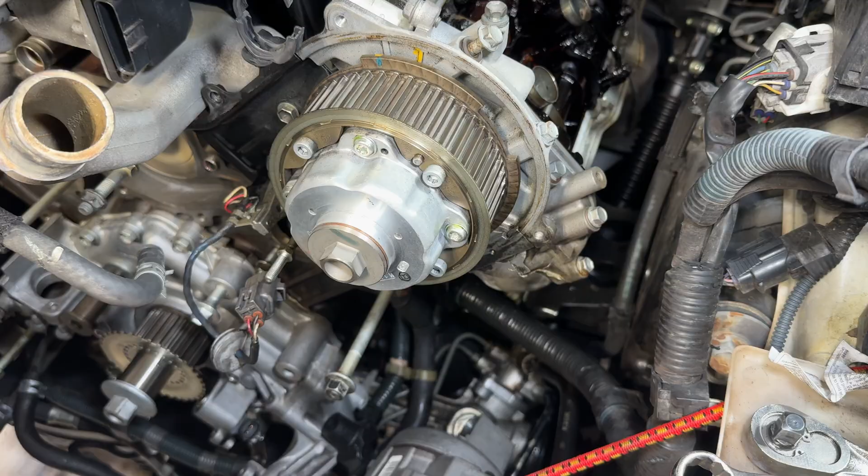So in today's video, we're going to be working on the GX470 again. I'm in the middle of my timing belt and water pump service, but I'd have to change the cam seals on here. So instead of doing it all in that long video, I decided to have a separate video just detailing how to change that out, how to take the cam apart and the VVTI gear apart so you can access that seal and change it out.

On the 2008 version of the GX470, on the 2UZ motor, they added VVTI, so changing that seal is a lot more involved than it was on previous versions or older versions of this V8 engine. On the previous versions, all you had to do was take apart the cam gear and put it on. On this one, you have to take the cam apart and everything. So in today's video, we'll go over all the steps of doing that, so stay tuned.

So I'm in the middle of doing my timing belt service, and I wanted to make this separate video detailing the cam seal and how to do that. This cam seal is a big pain in the ass, and most people don't do it if it's not leaking. And really, if you're not leaking or showing signs of leak, you shouldn't really do it either. That seal lasts a pretty long time, but if you do need to do it, this is how you're gonna do it.

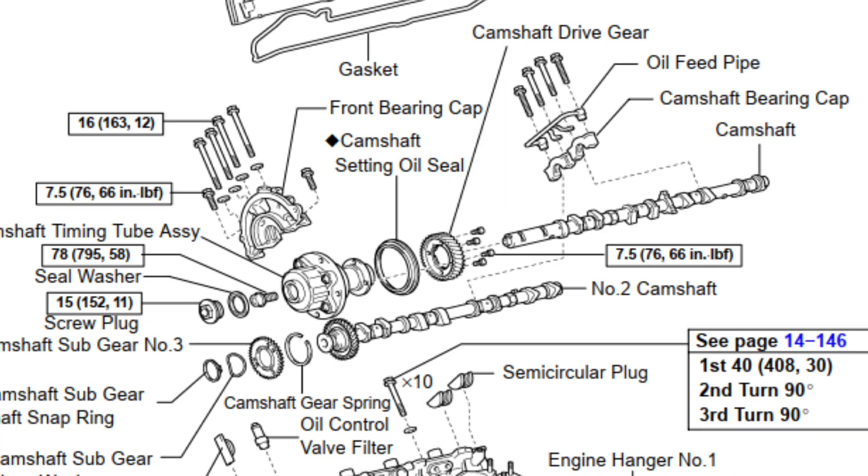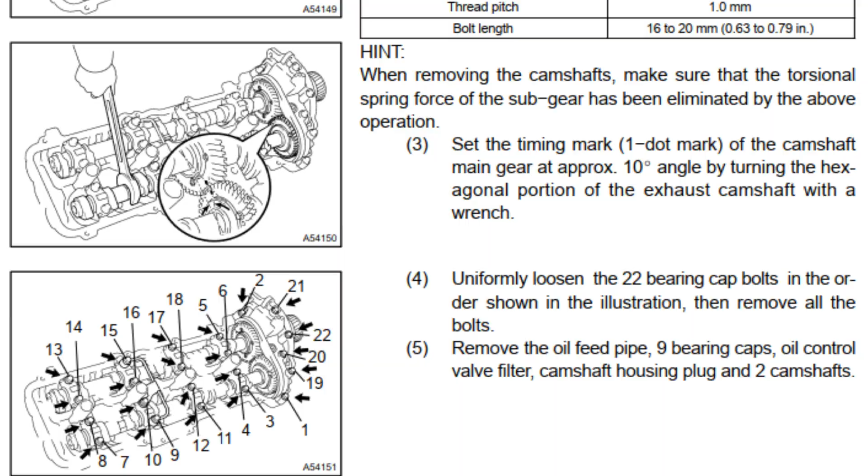So with the VVTI version of this engine, it's very hard, and you have to actually remove the whole cam out of the way and do it off of here just to get that seal. I think on the earlier versions without the VVTI, you could take that off and just change the seal right in the front, but now that they changed it up, you have to remove everything in order to do it. So the first thing you need to do is actually take this whole thing apart.

On the one without the cam gear, you have to put a service screw in there. In the factory manual, which I'll link down in the description, you actually have to set a 6mm screw so you don't mess up the spring loadedness of that second cam. On this one, it's all one piece and you can pull it off. Once you do that and put that set screw in at top dead center, you can go ahead and start unbolting all the cam caps.

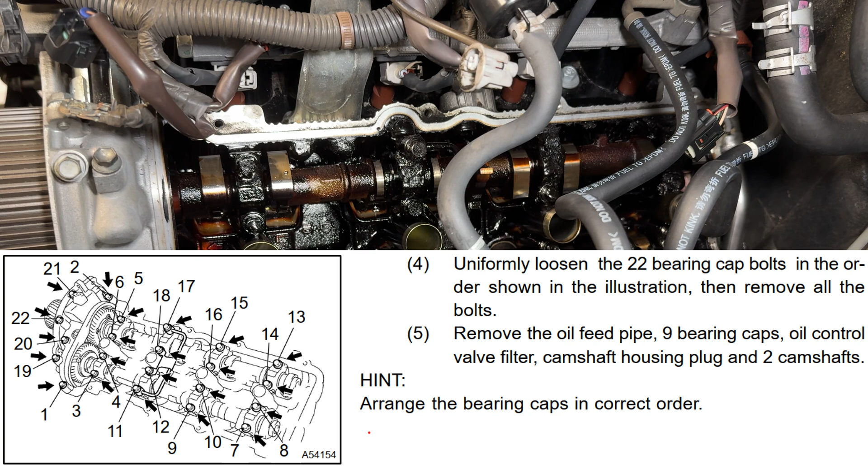There's an order to unbolt these cam caps according to the service manual, so I'll post a picture of it right now so you guys can see. Based on the order, you want to just start loosening. The first thing you want to do is loosen all these little 10mm using like a breaker bar, because they're pretty tight on here. At least mine are because of all this buildup and sludge that I have in my engine.

But go ahead and slowly unbolt or break all the bolts, being careful not to strip them. It might be good to have a couple of spares on hand in case you strip the bolts. You don't want to mess those up and then not be able to take it off later or put it back on.

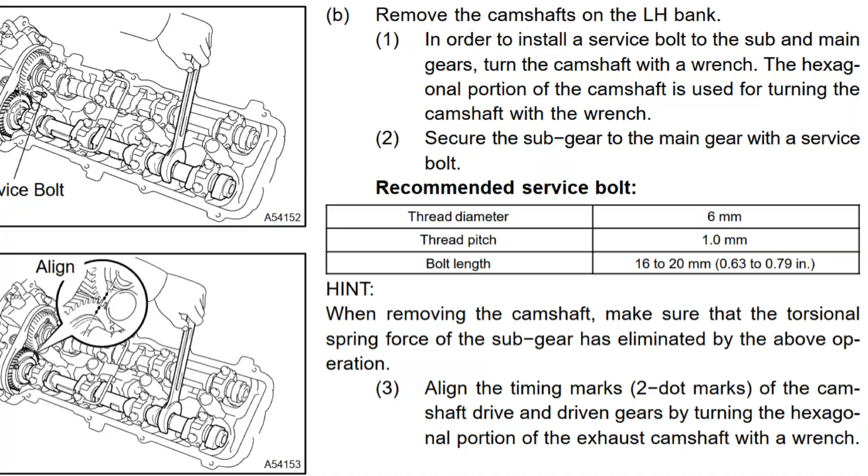On the driver's side, it's a little bit difficult because you have to actually turn this, because right now everything's in top dead center, but these things need to be turned all the way over. So you want to use that hex cutout that's back here, using a 23mm wrench. I think there's another cutout right here too, where you could put a wrench in. You want to turn this thing.

On this side, they have the 2 single dots, which is not where you need to put that service screw in. You actually put it on the 2 double dots, 180 degrees from this. So we got to turn the cam 180 degrees, get the double dots, and then we'll put the service bolt in over here. The wrench over here to hold the cam is actually a 24mm.

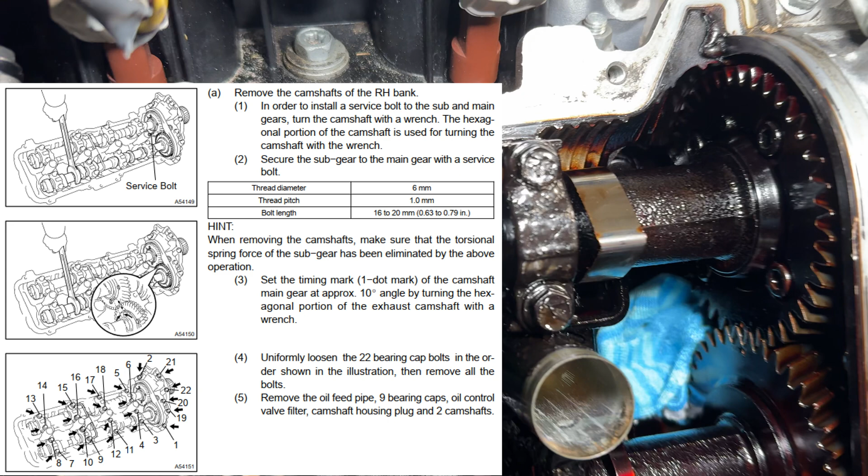So on the passenger side, what they want you to do is turn that thing about 10 degrees towards your way right here. Once we do that, we release the pressure on the cam and it sits freely, right? So you want to keep it about 10 degrees right there, and you can feel it release its pressure. So you want to do that, and then now we can start unbolting everything.

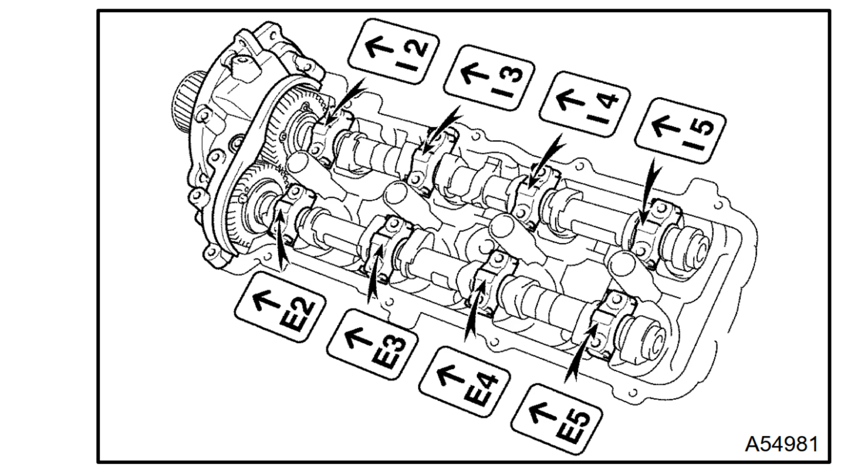As you go across and unbolt everything along the way here, you go ahead and just take those things off, kind of clean up all the cam caps. You don't have to worry about the order of them. Once you clean the top of these things off, they are all numbered from 1 through 5. 1 being the front here, 2, 3, 4, 5, and then you have the intake and the exhaust side. It'll have an E and an I on the cam cap, so you won't be able to mix those things up.

But as you go ahead and unbolt everything, the last thing you do is the front here and the 4 of these bolts that you take out. So these bolts all have like a seal washer on them. Be careful with that seal washer. I messed up 4 of mine by soaking it in Super Clean. That rubber does not take to Super Clean very well, so you want to take that thing off. Once you clean it off, you want to clean it with something that won't mess up the seals on these, unless you want to replace them at $5 each.

But overall, as we take off the cam cap, you have the VVTI actuator that you need to remove. So before we start anything on the VVTI and taking the cam out, you actually have to take these 4 bolts right here, the Allen keys, not the stars. Do not mess with the stars. Those are not supposed to be unbolted. That's all part of the VVTI gear. You want to take apart the Allen keys all around here. There's 4 of them. Take the actual ring for the timing off right there, because once you unbolt everything, there's actually interference between the cap and this, so you have to remove that.

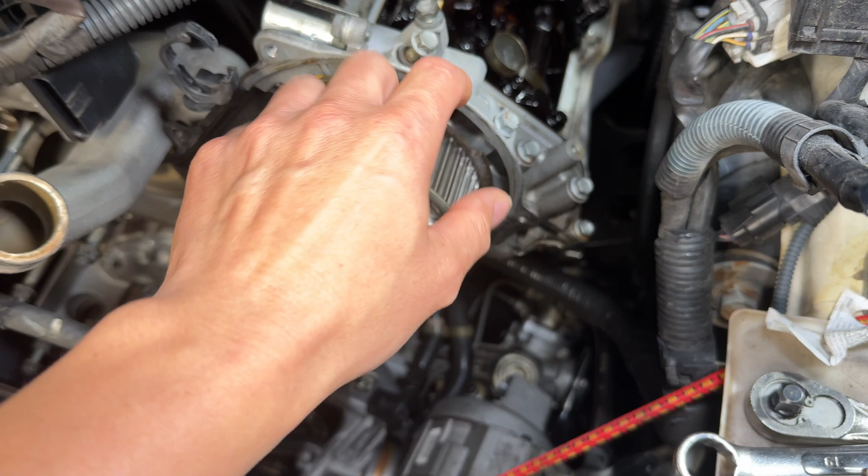Once you do that, you could take the cap off and you could pull the whole cam out once you unbolt all the caps. And pretty much unbolting it all, it's going to be the same on both sides as far as the left side and the right side of the motor. On here, the left side on the US cars, you have the fuel lines and kind of all this stuff in the way that you have to work around. On the other side, it's pretty much wide open on the intake side, so it's much easier to do on that side.

And one of the things you want to do, just so you don't accidentally drop a bolt, a screw, a socket, or anything down into the oil pan, there's 3 or 4 drains at the bottom of the head here. You want to stuff those with a rag or something. For the oil passages, the ones on the bottom are pretty much the same on both sides. On the driver's side or the left side of the engine, the big hole is on the back side here. And I don't think there's a big hole or any hole on the front, whereas on the other side, the passenger side, it's kind of flipped, where the big hole is on the front, but there's no hole on the back side of the head.

Since I'm cleaning everything, I'm gonna go ahead and remove the lower little black timing cover here too, along with everything else on this side. As well as the other side, it's actually held on by this sensor bracket right here for the cam position sensor. So I'm gonna go ahead and just start unbolting this right here.

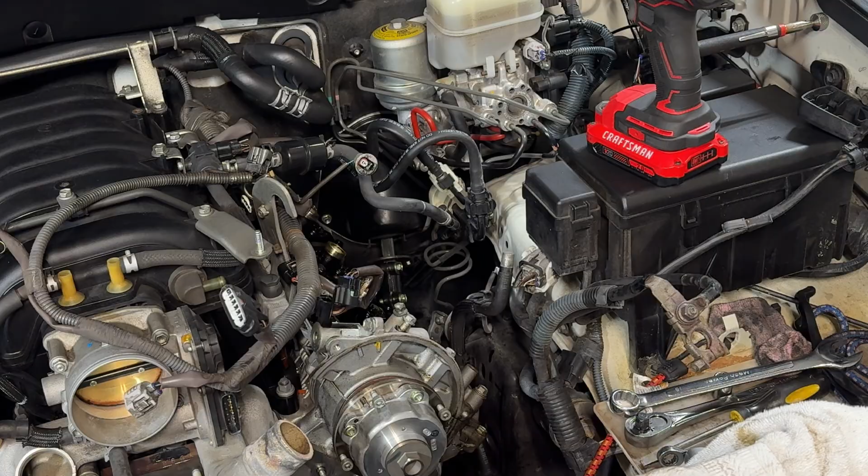So what they want us to do now is kind of turn this thing using the little hex spots to find the double dots on the cam. So we got that in there. So we want to go ahead and turn this thing so it's at the 2 dots so we can remove the cams. All right, so we got the service bolt in, we got the cams positioned. So we start unbolting all the cam caps now in the order that is recommended in the service manual.

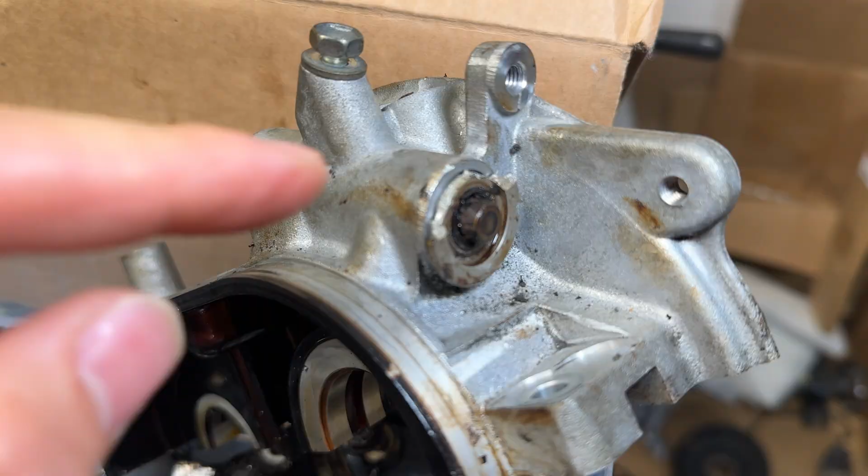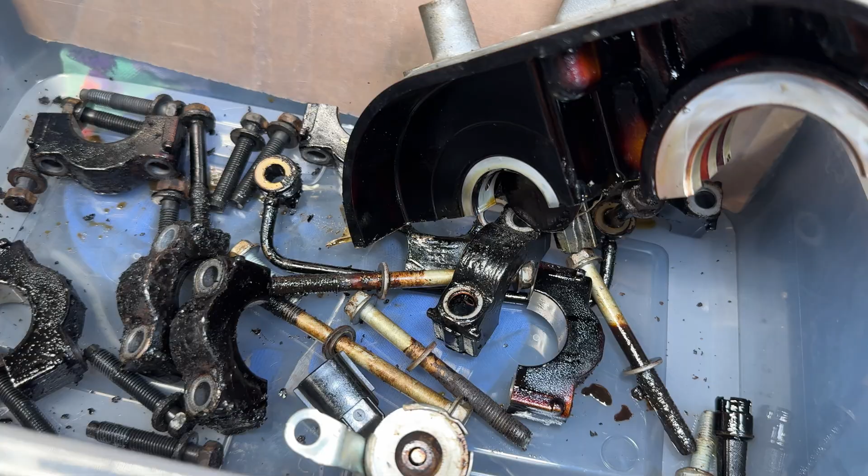So right now the casting basically broke, so I probably have to replace this with either a used one or an aftermarket one. So I'm not looking forward to spending more money on that crap. Other than that, the rest of the stuff, this time I'm going to go ahead and try to soak this in some diesel, see how much that dissolves this grease, and then we clean it off, and then I can hit it with some Super Clean after that, and then put it in the ultrasonic cleaner to see how much we can get cleaned off of this.

Man, I've never seen the oil in an engine so bad as this one. For 120,000 miles, this thing is garbage. This is the VVTI filter right here. If you look down the center, you can't even see through this thing. It's freaking solid. I'm surprised we're not getting VVTI and other different codes off this engine from all this shit that I'm seeing in here. But luckily I ordered new VVTI filters and all this other stuff.

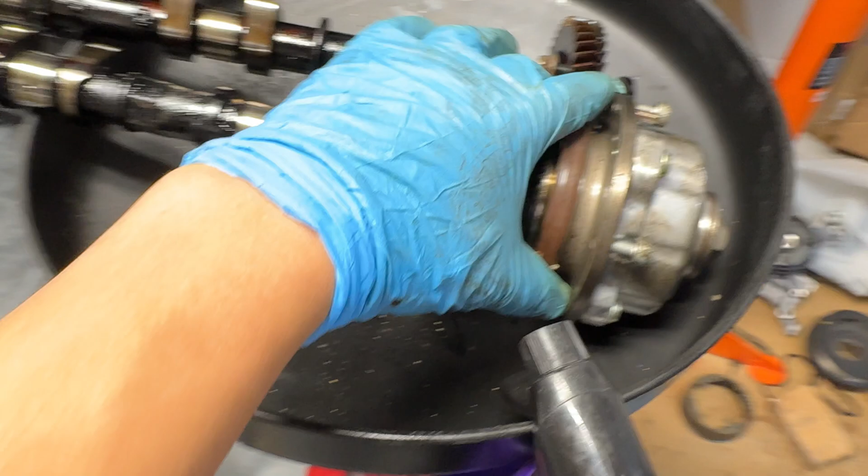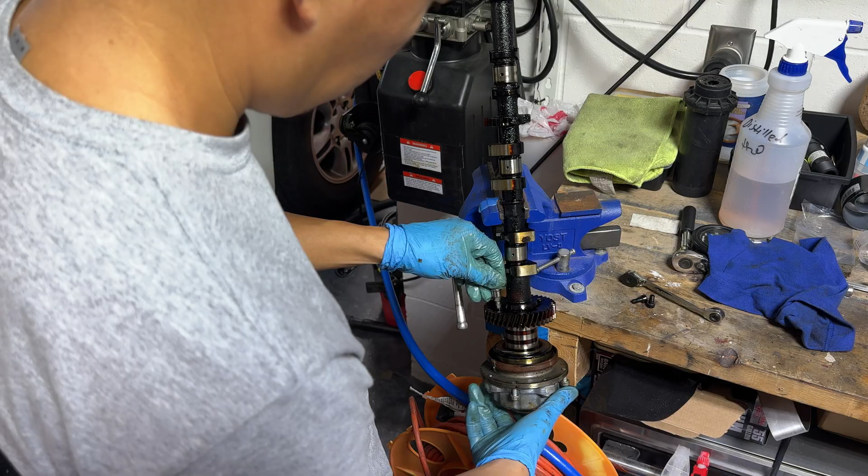So as far as changing this seal, which was our ultimate mission here, initially I wasn't thinking about changing it, but after seeing this engine, I do not trust this seal. This thing has probably been through a lot with all this dirty oil. What the manual tells you to do is basically clamp at this spot right here on a vise so you can get some leverage and take these bolts off right here. So one of the things I forgot to do was unbolt the actual tube and the bolt down here.

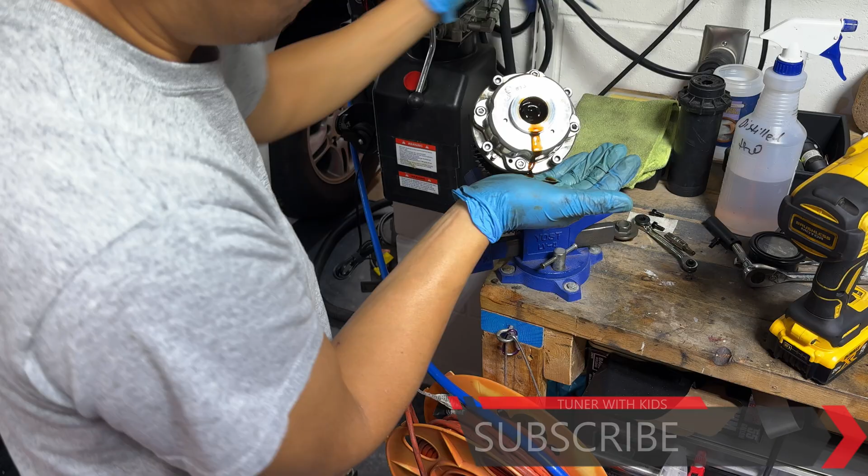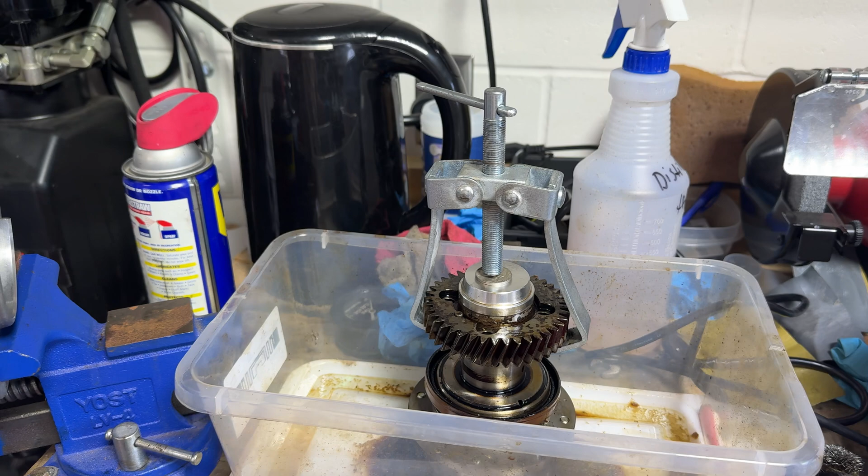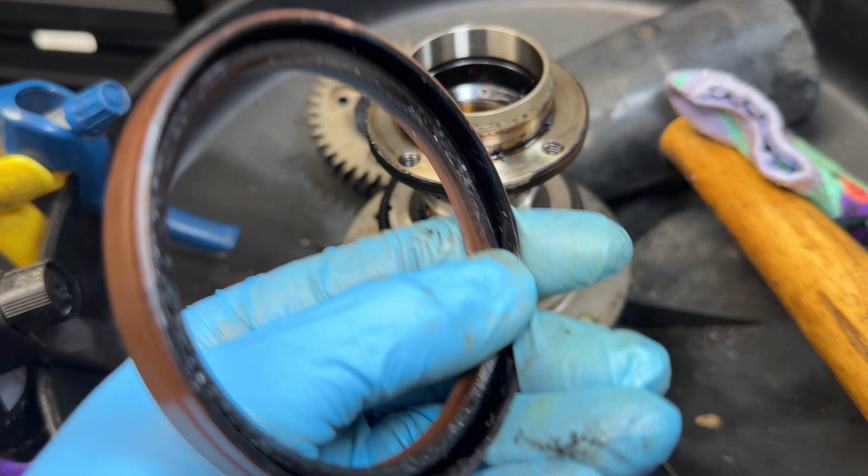Alright, I'm gonna have to tap this thing out. It's seized onto here. Alright, once I cleaned it up and I got this thing knocked out, the sprocket that comes out of there, you could pretty much pull the old seal off right here. So inspecting the seal, it looks like it's still kind of rubbery and it could have gone longer, but with that oil buildup and all that nastiness in this engine, I just didn't trust it, so I might as well change it while I'm in here. Go ahead and just clean up the rest of this right here to make sure I get all this varnish off from all that old oil before I put everything back together.

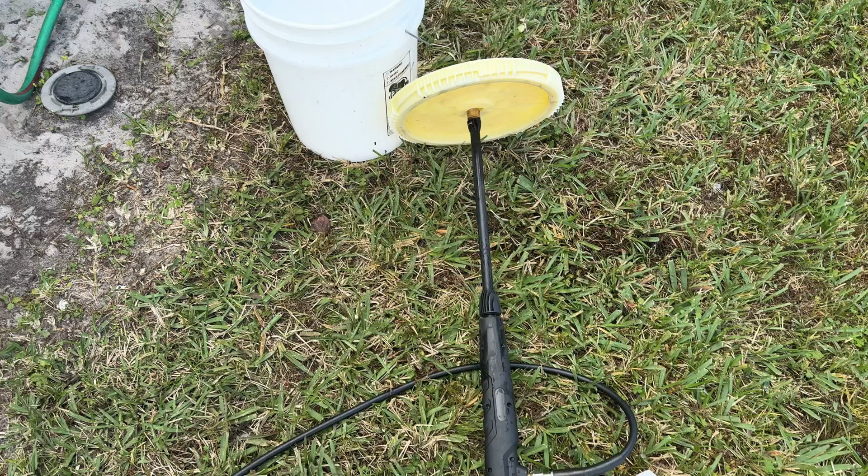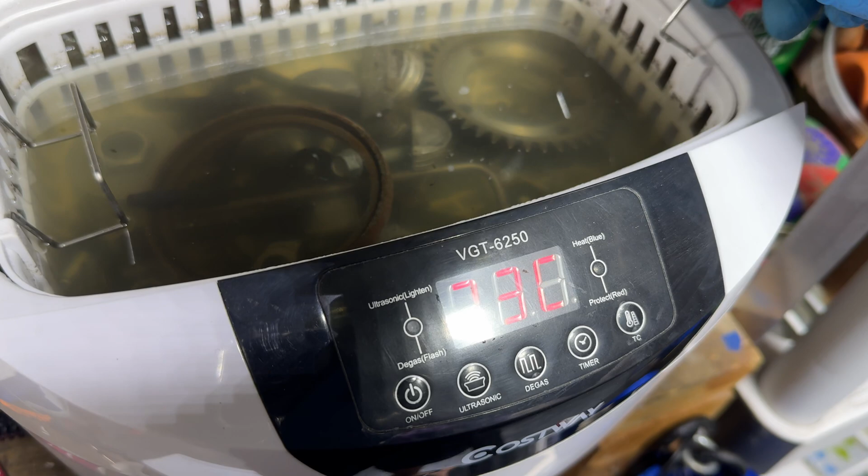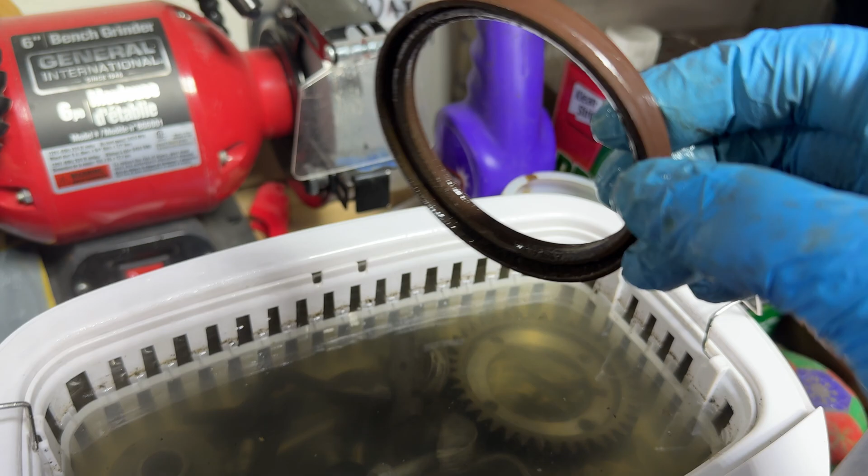Alright, got all the parts soaking in this clear bin right here with the diesel. I'm gonna put some of the smaller parts in this bucket with my little lid with a hole in it and the pressure cleaner just to wash it all down inside here to keep all the mess contained inside the bucket. So I busted out my ultrasonic cleaner that I forgot about, and I cleaned all the parts after I already cleaned them with Super Clean. So I just put it in here with a little bit of Super Clean and hot water just to run it. I even put that seal in there just to see what it would do, and it looks like we cleaned up a lot of that oil that was on that seal. So I'm gonna go ahead and take this thing out and polish these things all up.

So this big old oily, no oil change sludge mess, I'm gonna go ahead and vacuum up all the bits on here, spray some Super Clean on it, let it kind of dissolve some of this away, and then vacuum it out. A lot of this stuff I'm gonna have to scrub by hand to try to get this out. I know a lot of people don't recommend that, but I've blocked off all the passages and I'm just trying to clean it up as much as I can. This sludge is really bad. So I'm gonna run a quart of diesel with 3 quarts of oil in here for a little bit right after I put it all back together, and then I'll drain all the oil, put in new oil, and do like a 1,000 mile interval change just to see how much we can clean up in this thing.

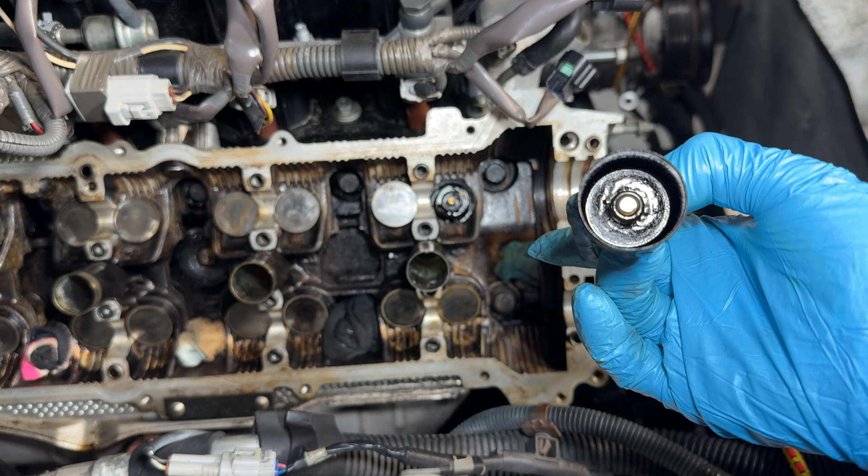So I was over here cleaning these things and I realized that you could take these valve caps off right here and pretty much clean them up. These things are so full of buildup and sludge that I'm gonna go ahead and take them out. That thing in the center right there is an actual little spacer or washer, and there's so much gunk that is just stuck in there. So those things were all coming out. So I'm gonna take all these things out right now, put them in the ultrasonic cleaner, and try to clean them up a little.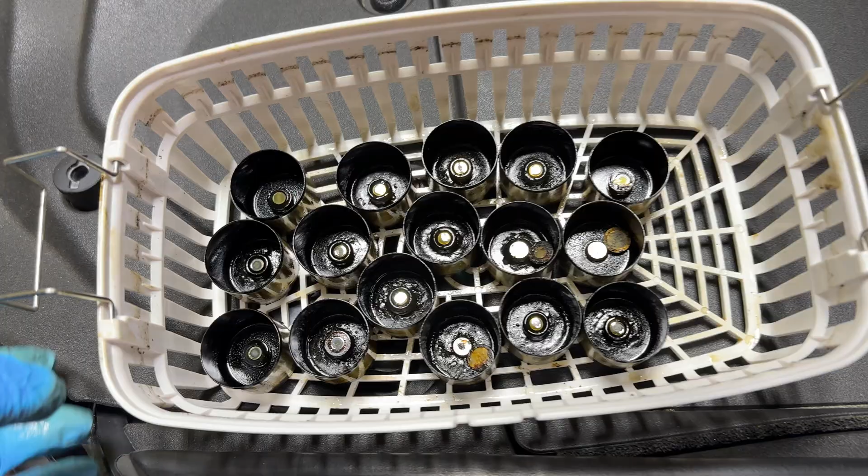Got all those caps out right there. See that with all the gunk and everything in them. So we'll go ahead and put them in the ultrasonic cleaner over here and let this thing clean itself up.

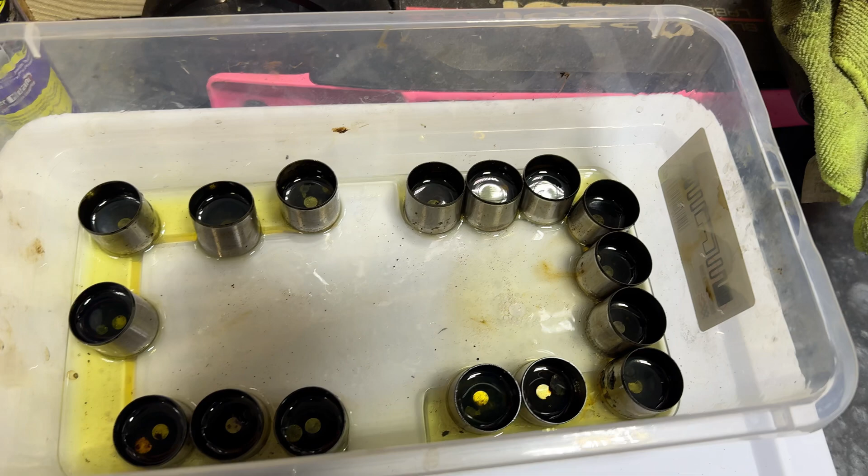So after the ultrasonic cleaner, it didn't get all the residue and anything off. So I'm gonna go ahead and soak it in here with some diesel overnight. See how much that diesel cleans this thing up.

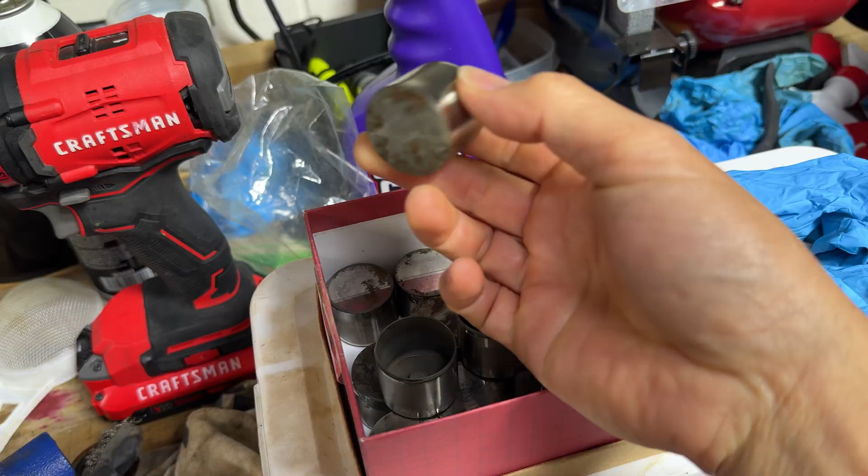Alright, so after soaking this in super clean overnight and then putting it back in the ultrasonic cleaner over here, I was able to clean out most of that carbon buildup and all that crap on the inside of here on all these lifters. So you can see it's pretty clean, no more residue. On the outside, it did get a little bit corroded from just sitting in the bath of super clean and water, but that's okay because this is a spot where it's gonna rub against the lobes anyway, so it's gonna just end up polishing itself back to the stainless steel.

But overall, we're pretty happy with this. We'll go ahead and put this all back together into the valve train and get this thing all put back together on top.

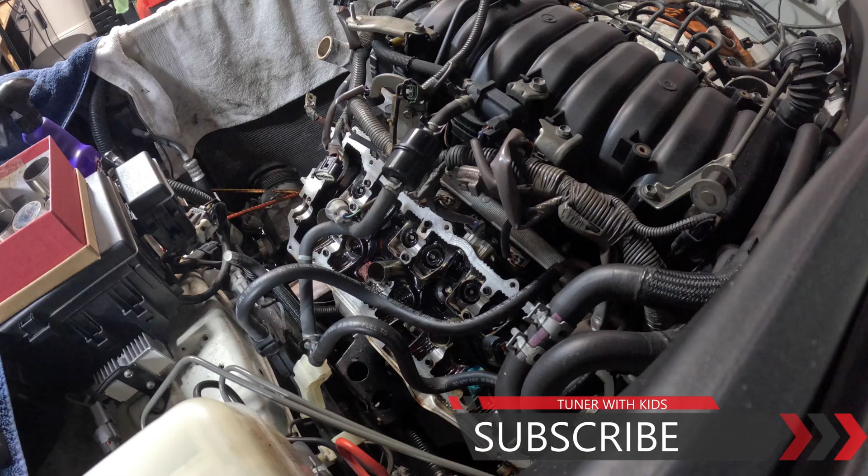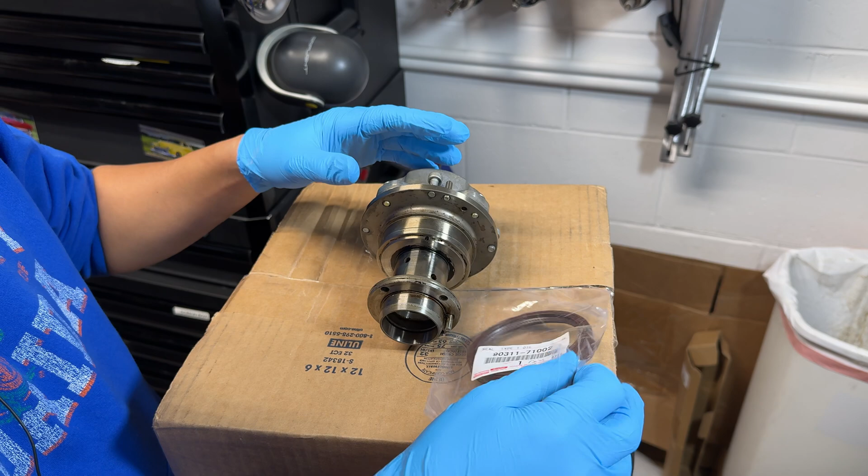All right, so after we got everything cleaned up, got everything off, and took the old seal off, we're gonna go ahead and put the new seal on. There's the part number right there. What you wanna do is remember the orientation of the seal. So the front of the seal is gonna go towards the outside.

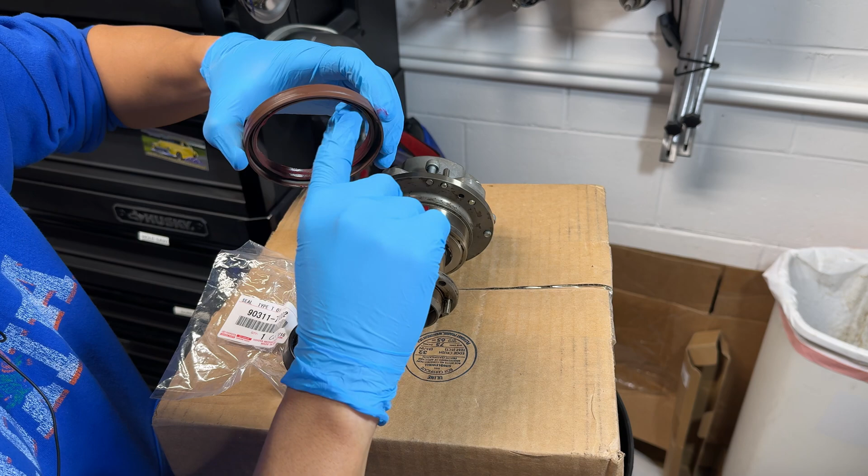You wanna just go ahead and put it in there, but before you do, you wanna grease this up with some just regular general purpose grease. So we'll go ahead and put a little bit of that around the ring so we have something to ride on, and just kind of put it on the inside of this, all the way around. Give it a good seal. And we'll put some around the edges because it's gonna eventually have to sit in the race, so you wanna make sure that thing's got a little bit of grease on it.

You wanna put this thing on there, make sure it slides on evenly, nothing wrong with it. So that's pretty much it. And then we want to put the gear back on and torque those things back together.

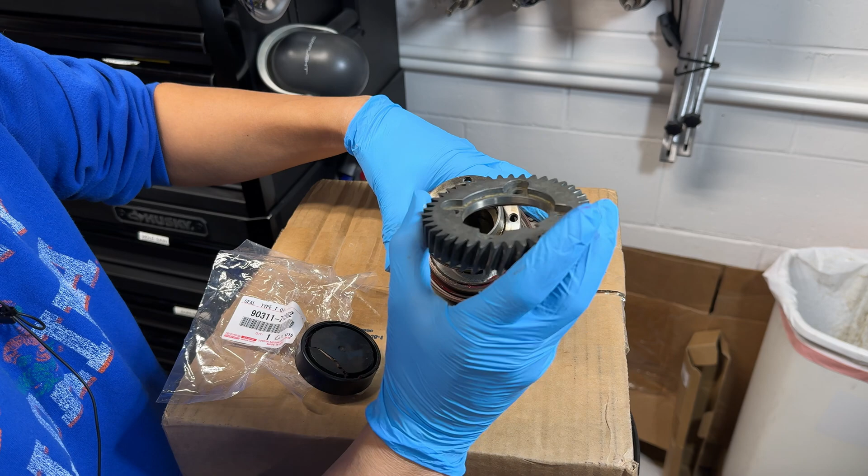So remember the orientation of your gear. So this thing slides back on there. There's a dowel pin right here that it goes into. You want to slide it into there, and then you want to put the bolts down into here. So the bolts are only like 66 inch-pounds, right? So they don't need to go on that tight. So they're basically a 10mm torque. So you want to put in there less than 10 foot-pounds to get those things tight in there.

All right, the next thing we need to do is put this thing all back together. We're gonna go ahead and get it onto here. I've got it clamped onto the clamp so we could actually torque it.

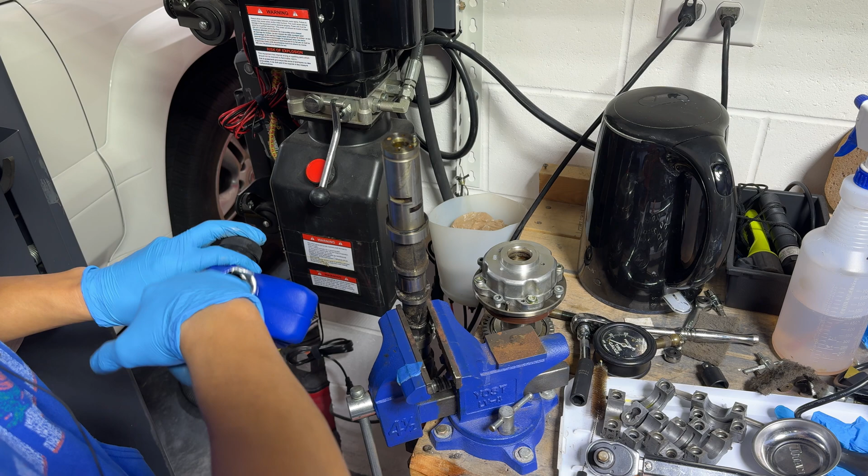First thing you wanna do, you wanna clean your shaft just to make sure everything's clean. Put a little coat of oil on here. There are oil passages that pass into the VVTI up here and into the actual bolt down the center. So you wanna just put a little bit of oil all around this just to make sure everything's lubricated once we put it back in there.

So you wanna make sure you clean this thing out inside of here. This thing is full of oil and other stuff from me cleaning it. So once the oil flows through, hopefully it cleans everything out. So you want to get it in here. So inside, there's dowel pins that match with that one right there, along with the oil holes. Just make sure you kind of get it close to that edge.

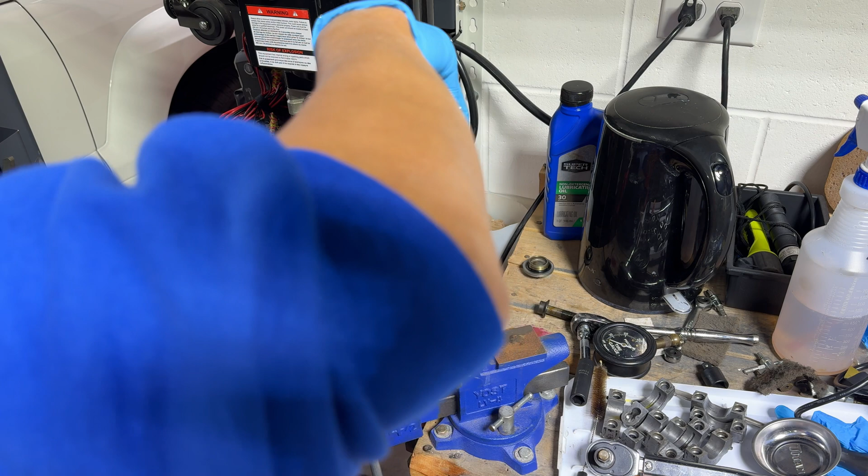And once you get it in there, you want to just turn it, and then you'll hear it. You'll hear it just kind of get in there, and they'll stay. So once you're in there, then we get this bolt. So this bolt is actually 58 foot-pounds. Make sure it's clean.

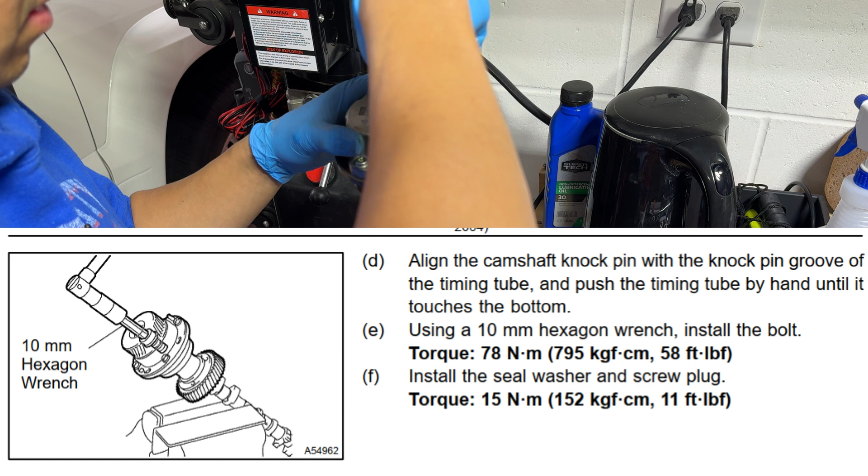All right, so I already got my torque set to 58. Make sure I want to make sure it gets a good grip on this. So.

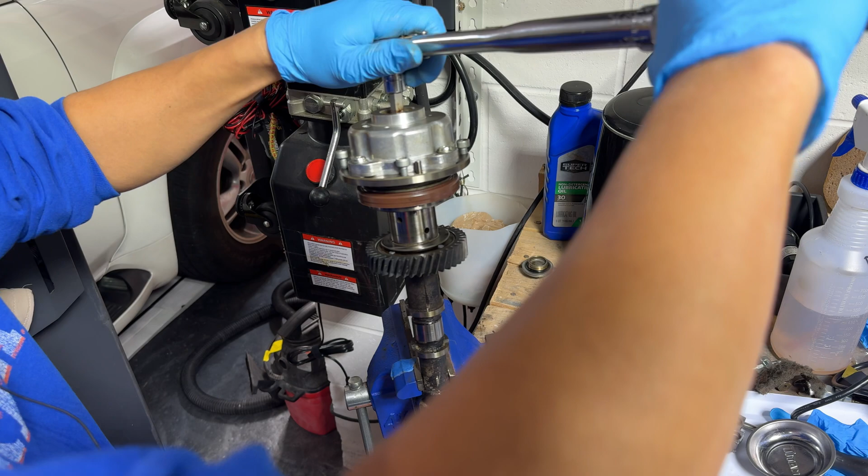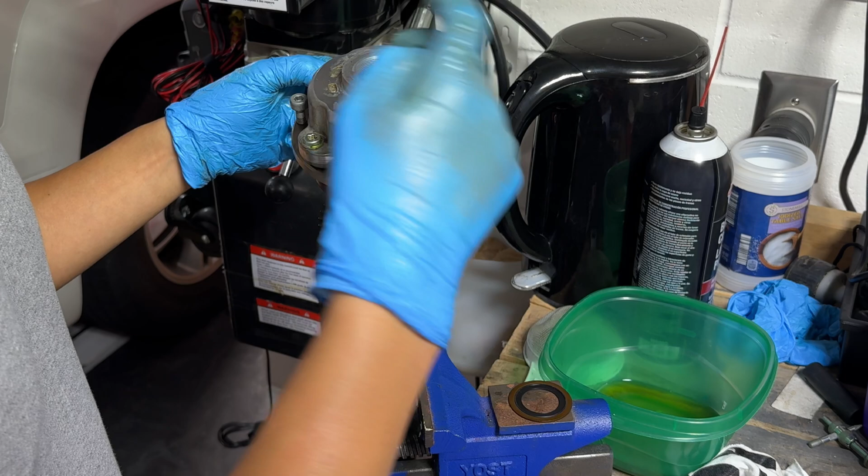Once you do that, make sure you have the seal washer back on here. This goes to 11 foot-pounds, basically the torque of a 10mm, so it doesn't need to go on that tight. Just put it in there, and I'll go ahead and tighten it down, torquing it to spec.

One thing you have to do before putting the cam back on, at least on the right side, is make sure your key is set to 90 degrees vertical. Right now I'm at top dead center, at the dot timing mark. They want us to go vertical to this center bolt with that timing mark or key. So I set it to 90 degrees vertical with that line to make sure we don't get any interference when we put this cam back together.

Once we put this back in here, we're also going to make sure we line up that new seal to this race. I'll put a little bit of multi-purpose grease right on that race so it slides in better. You want to make sure it's seated perfectly onto this all the way to the ends so you don't get any leaks.

Once we get the cam over here, you want to look for that one dot right on here. You're on the single dot. Make sure that it's close to the inside because you have to mate that up later with the other cam. Make sure that's in place, and line it up.

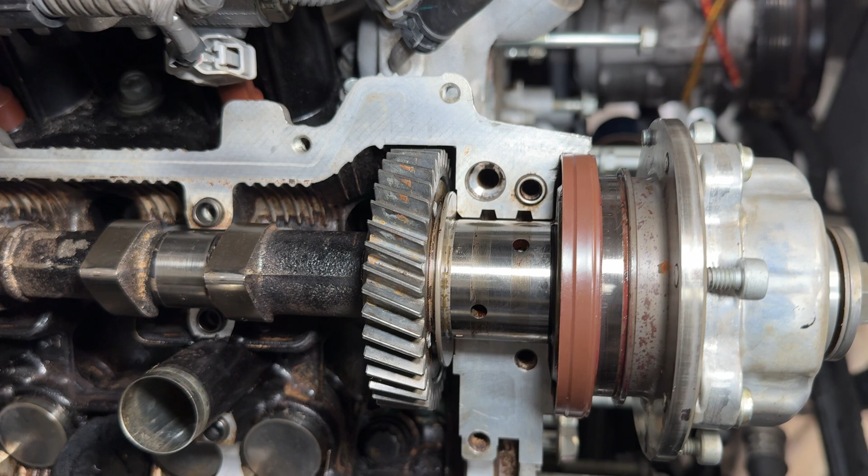Around the edges here, make sure the seal is all the way in and this thing is sitting inside the oil race right over here. You want to make sure that seal is all the way in, flush with this edge on the inside, and on this side too, sitting inside that race, so that way you can pop it down.

On the inside, you want to make sure you line up the dots, because when we put the other cam on the bottom here, we want that dot to line up also. So you line up the other cam and try to get that dot around the same spot. It helps to have some light in here so you can see, but you want to do that.

What I want to do is just go ahead and pop this thing in right here with the way the seal is, slipping it right into that spot.

Make sure my dots are lined up. If they're not lined up, you have to pull this thing out and line them up again. If you recall earlier when we took it off, they wanted us to turn those dots so it pops right in, and that way there's no pressure on all the cams at top dead center so they're not pushing down on the valve. You want to get it into that same position as we put this back.

Then we can start putting the cam caps back on and bolting it down.

Before putting the cam caps and all the bolts on, I went ahead and put a little bit of grease on all the contact surfaces, just to have something to ride on when this thing first starts up with no oil in the cams yet. Put a coat of multi-purpose grease on the thrust gears and everything to make sure you have a lubricating surface, because when this thing spins, it really just spins with a coat of oil between the caps and the actual race on the head. You want to make sure those things are good.

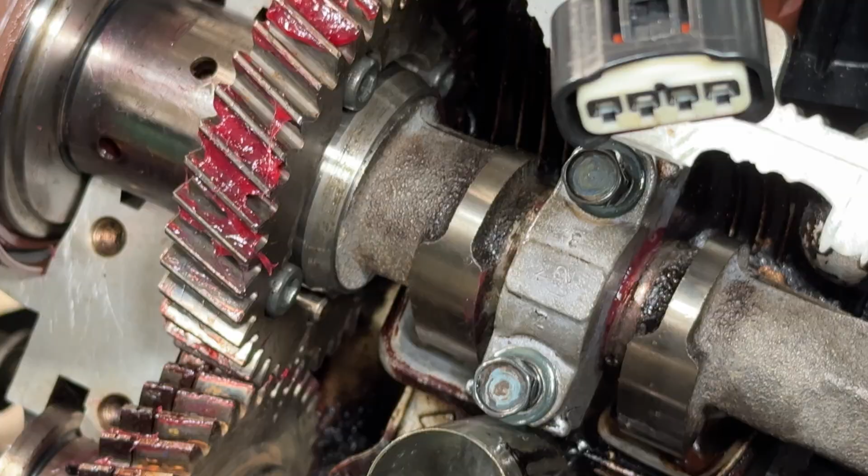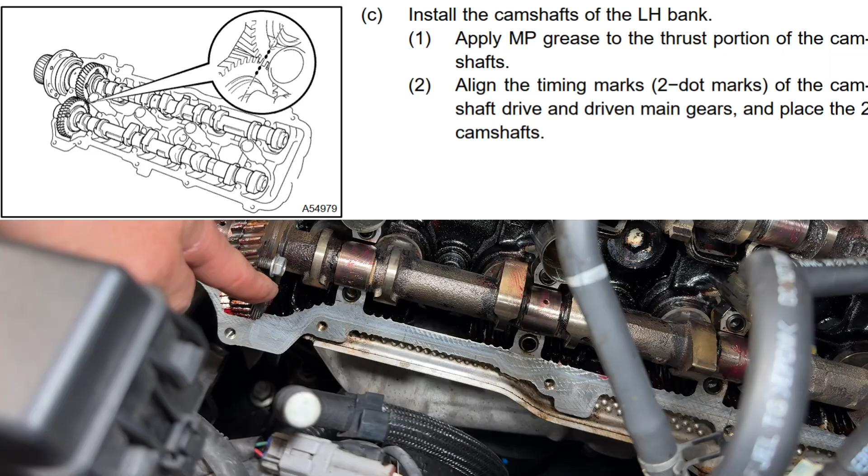On the driver's side, on the left side, you want to make sure the two dots are touching each other and the single dots are on the outside. We'll bolt it down, remove this guy once you bolt it down and torque everything, then turn it back to top dead center, which is a single dot touching each other. It's weird on this side where you have to turn this after the fact to get to the service bolt, but we want to remove that service bolt in this position and then turn it back to the single dot to match the other side.

In addition, once we start putting everything back in, you want to take a mallet to tap this down if it doesn't go into place and sit into the race properly.

On this end there's a cap that we have to put the form-in-place gasket on. On the front end, there's a little area where you put the form-in-place gasket and let it set. You have 5 minutes to put it on and bolt it down before that stuff starts getting tacky, so remember that when you use the form-in-place gasket, but we want to get that down.

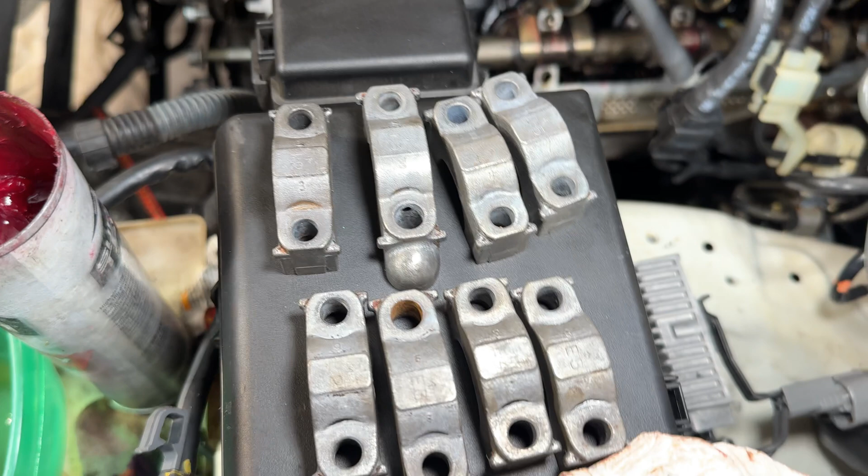And then the rest of these bolts, we want to put the cam caps in place. You want to set them in order from 2 to 5, so it goes 2, 3, 4, 5 all the way to the back. Make sure the intake's on top, the exhaust is on the bottom, obviously, and then bolt those down to 13 foot-pounds.

Every bolt on here is 13 foot-pounds except for the two end bolts, which are just holding bolts, 10 millimeters. Those are going to be about 7 foot-pounds, but everything else is 13 foot-pounds that we've got to torque to. Also, when we're putting that cap on, don't forget to put the VVT-i filter right here.

I have a brand new filter, even though the ones I took out of here were filled and sealed up. I was able to clean them out with degreaser and super clean, and they're all clean again, but since I bought brand new ones, I'm going to use the new filters here.

We got everything in here. I ended up threading all the bolts onto here, and that crossover oil tube right there on this cylinder, we want to make sure we get that in place. There's an arrow that says down for exhaust, so make sure you put that in correctly. But overall, what you want to do is get this all in place.

Right now I hand thread everything in. I'm just going to shoot it in, not tight, but just shoot it down so it's snug before I torque it. And then there's an order to torque all these.

We have to start with this cap right here, so I need to prepare this cap on both sides at the same time, so that way I can get the form-in-place gasket down within the 5 minutes of work time.

All right, went ahead and put all those caps on, tightened it with the impact driver just to screw it in faster. All I did was hand tighten it to get it down, and then once we put these end caps on, we'll start torquing everything down to spec.

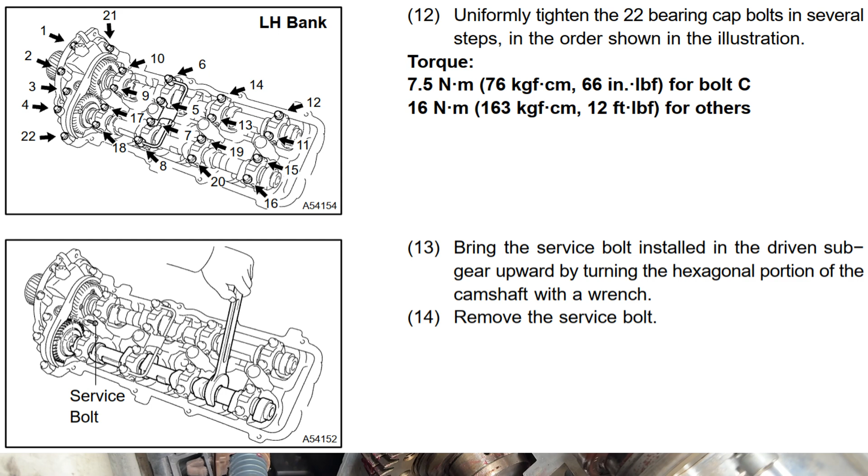These things only need 12 foot-pounds, which is not that much, so don't over tighten it, because remember, these caps are just holding that in and holding the cap in place to ride on that layer of grease and oil with the cam spinning in the race. It does not need to be that tight, so don't break anything by over tightening it.

For those end caps, I remember when I was cleaning it, I used too much super clean and I killed those rubber seals on the washer, so I ended up having to buy 8 more of these, special order. These things were $4 each, which is freaking expensive for what they are. You can see they're just regular washers with a rubber gasket in the middle that fits on these long bolts on the end cap, so there's 4 of them on each side, so I had to buy 8 new ones for those.

This side, to prepare it before we put it on, I want to clean this area again with some acetone just to get all the grease and oil off so that form-in-place gasket can seal better.

You want to make sure you do that before you start. Same with the actual cap - go over there and clean that off and clean this off, and then go ahead and put the filter into here so you don't forget about it.

These new filters come with this protective cone cap right here. Just go ahead and pull that off and slip it right into the hole, sticking up, same on both sides. Just leave it sitting there, and once we put the cap on, we'll go ahead and bolt that down.

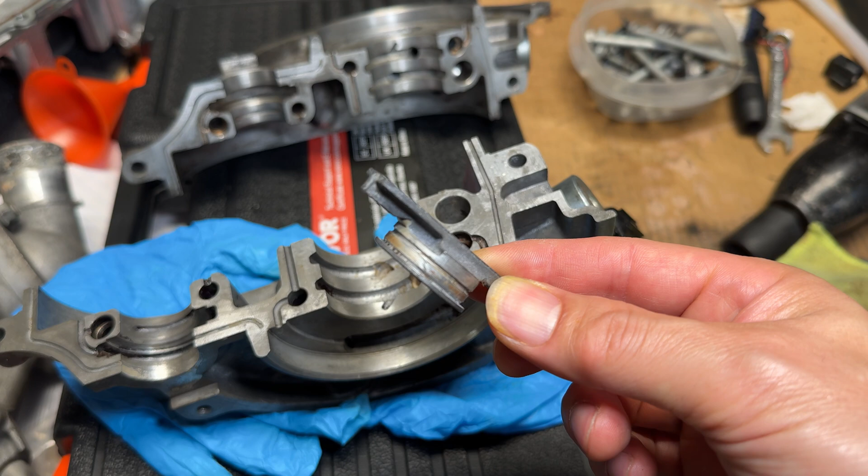Next thing we got to do is put the form in place gasket in. On the end piece right here, you see that groove right around the circle part - you just need to get a layer or a bead into that groove and slide this thing in. On the actual cam cap itself, they're basically mirror images of each other on both sides.

What you want to do is get it around this edge right here. You don't want to get it here because that's an oil passage right there, as well as these - these are all oil passages, so you want to leave those alone.

Over here, this groove that's not as deep is for the form in place gasket, so you go all the way around this edge right here. Don't go into here because that's where this piece ends up sitting when it's in there, so you don't have to worry about this piece.

Right to here, and then right there you have that regular cam seal, so you don't need any more after that. Continue again back this way, down that way. You don't need it out here because this is not anywhere that's sealing oil. On the inside, do not get any of these grooves right here, or right here.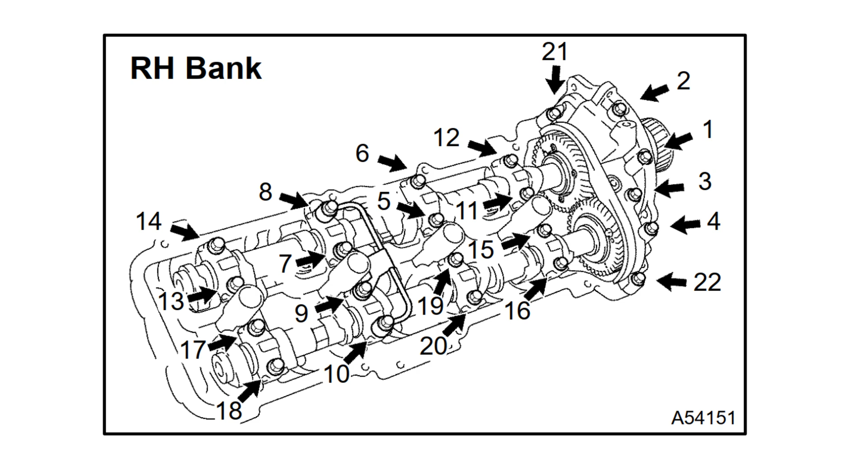Next thing we got to do is remove the service bolt. Remember, on this side, the driver's side, we had to put the service bolt right here, but then we also had to turn it to double dots. So we're going to remove this thing and then turn it to the single dot side.

This side, everything was pretty much set already as far as the position goes. So what we're gonna do is go ahead and just take the service bolt that's right here off, right there, and remove that service bolt, then get everything to top dead center by lining up the single dots.

Hey guys, thanks for joining me all the way to the end of that video on doing those cam seals. As you can see, it's a freaking tedious job, especially on this vehicle where you have to take out the cam. This is not normal for most Toyota engines, but with that VVTI gear and the way they designed it, you have to take that thing out.

And then on top of that, all that sludge and cleanup I had to do on top of the head made the job even worse. It took me a couple weeks to do this, working on it one step at a time, but in this video you can see it can be done in a couple hours if you're patient and you have the time to concentrate and work on it.